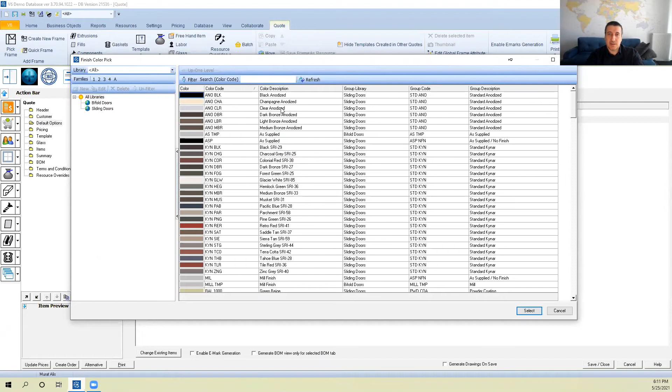If I go here, you will see V6 is supporting all types of finishes: anodized, clear, champagne, bronze, and some Kynar finishes, plus all the powder coating options with the actual colors. When you pick those finishes, it will affect your actual pricing as well, not only visually.

The same way, we can also pick a glass, and we have our own glass library with different glass thicknesses. You can build your own library in V6.

So I'm going to start with the actual sliding door here. These macros are shortcuts to add elevations quickly. So I'm going to add an elevation here. It's going to be a 4-panel elevation, overall 135.

And I want to put a screen. So this is the suggested configuration for that item. I click OK, and it's going to build that elevation dynamically.

So this is my elevation. You can see the price automatically calculated at quote time with the default options picked, and I can change those options. I can configure my door again with different track types, different head track, different sill track, different style and top rail, and so on.

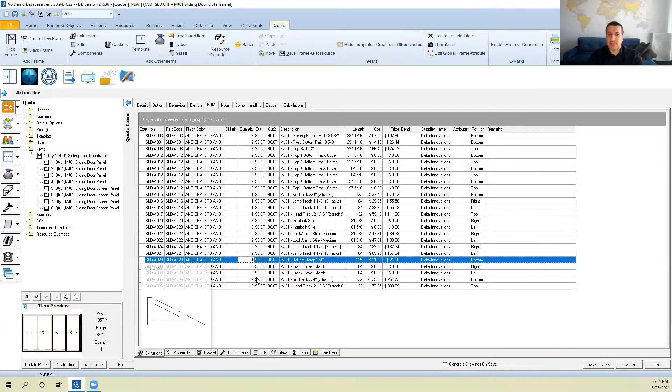Then I can show you the bill of material. This is the list of all the extrusions used in that item. We have the length, cut angles, quantities, and also finish and part numbers. This is the vendor that I need to buy the profiles from.

Then a list of components. We have just three test components here, with the actual quantities. This cost and price we can hide if you don't want to show it. And this is the glass.

You can see there's only one size of glass, and the reason is the system is set up to automatically keep equal glass sizes. So even if you change the width or height of the frame, the glass size will remain unique within all those panels.

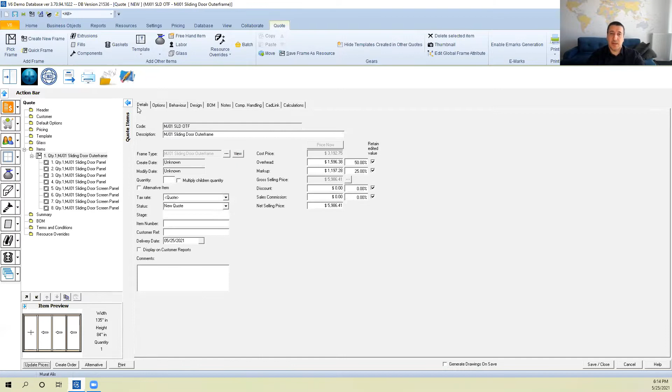Now this is my elevation, and you can see the price being 5,986. If you do a change here and make it 145, dynamically the model will update and the price will become over 6,000 now.

And if I do a 3D view, you can see that this is the presentation of that, with the actual profiles in there.

Now, if I want to make a change on this, I can click this button and say the top rail, I want to move that one to make it a bit bigger. And I want to do the same thing for the fixed top rail, the bigger ones. If I click OK, you can see right now the picture updated, and we have the bigger top rails here.

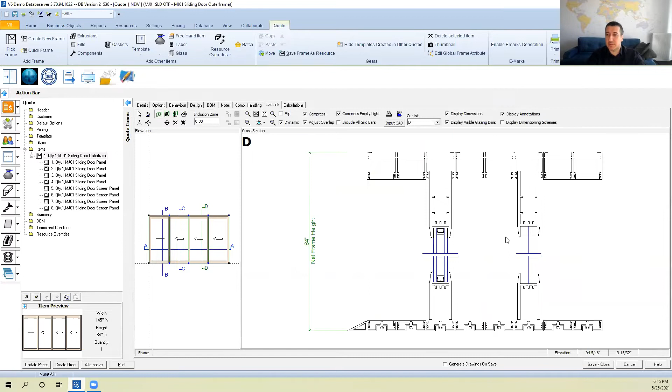And actually the price got updated slightly. The bill of material automatically updated, and also the 3D view, it will now have the bigger top rail here. You can see that in here.

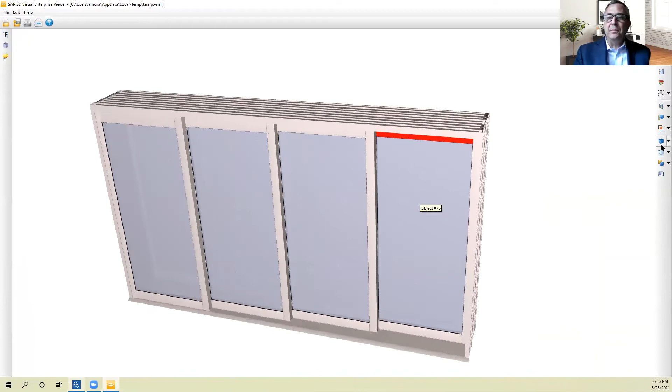So the important thing to note here, Murat, is anytime we make changes in real time, it's calculated and captured by the software engine to update in real time, correct? Exactly.

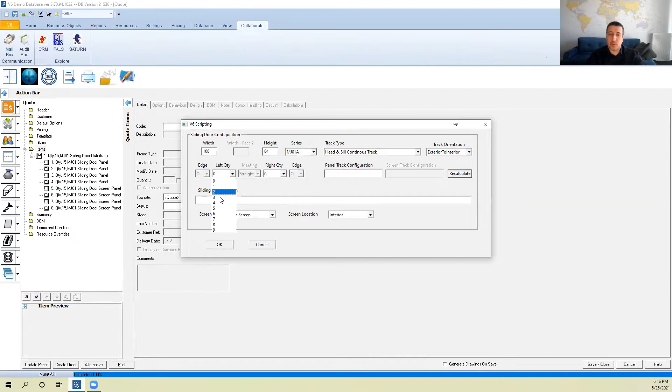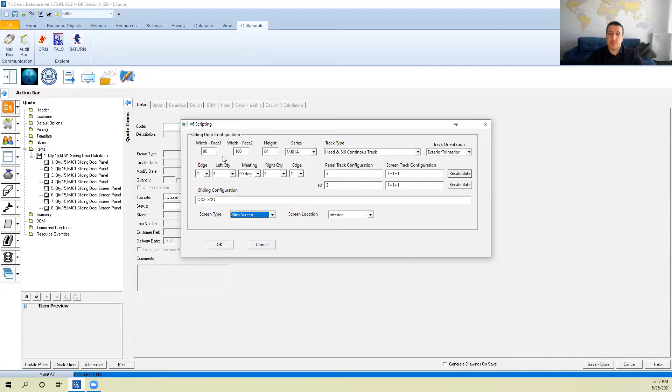Now let me add, we can put some volume to this. Let's say this quantity will be 15. I want to add another one, so I click this button. This time I will do a corner item. Let's say it's 3 by 3 with a 90-degree corner, and maybe 100, a different size here. And I can put a screen again, maybe a slim screen this time. So this is my configuration. I click OK.

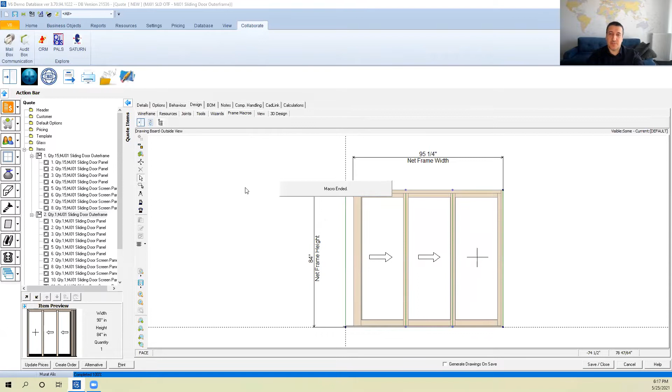And this time it will be, and we can understand better, it's 3D now because it will be the actual corner. So it will do a small model of that building, of that frame. If I show you the rotated view, this is what we have. And if I do a cut, you can see that. This is how things are coming together. And again, it's equal glass automatically in each face.

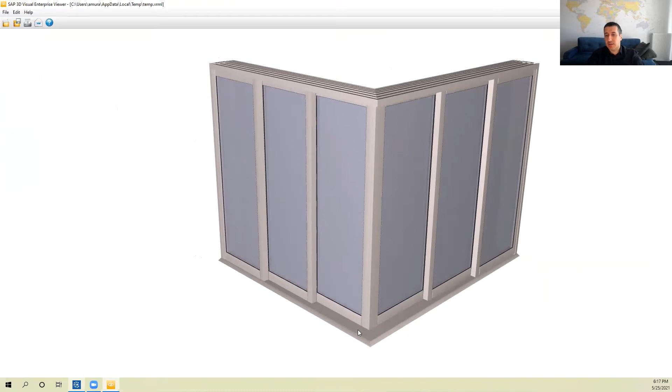And if I show you the 3D view, you will see that the V6 engine is quite smart. It has a formula and drawing engine embedded together. So what it does here is, it's saying, okay, we have a corner, and the cap here needs to be mitered. So automatically it makes that miter. And it only uses the cap on the area that we need, so the cap is stopping at that edge. So it's actually achieving a step cap.

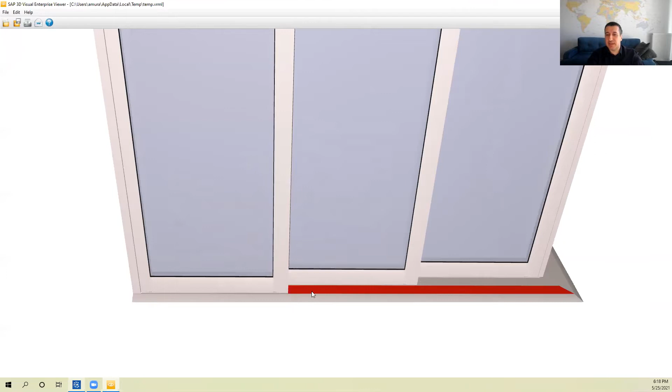Normally you would do a lot of manual work to achieve this, but everything in V6, on that database, is automatic, so you get that. And also we can see a live cross section. If I move that up, you can see how things are coming together. That's a real model of that elevation.

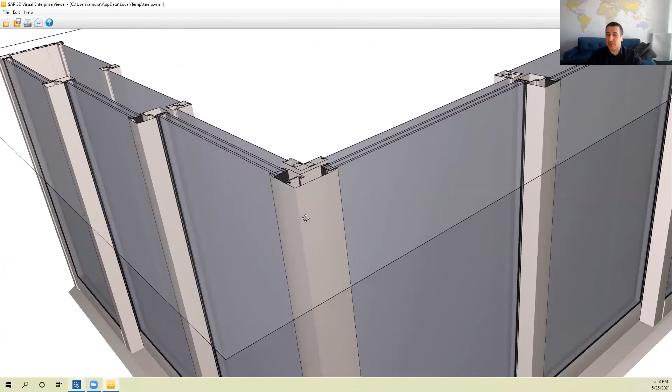So that was just the two items, and I'm going to give a quantity of 6 on this one. So this is a corner item. Now, if I add another one, this time we'll add a bifold, and you will see a different configurator for the bifold. All it asked was how many to the left and right, but that was it. And again, it's equal panel. We have the overall width.

Now, as an estimator, one important thing is that when you configure this, you need to be making sure that it's a valid one. We don't want to give our customer, a prospect, a quote which is not making sense, and which is not actually approved in engineering validation.

So I'm going to change this size to 165. So far it didn't fail. Let's make it 175. Now you can see there's an exclamation mark here. And if I bring my mouse over it, it says the maximum allowed width is 40 inches, and actually my panel width is 42 inches. So it's warning me that there is something wrong here.

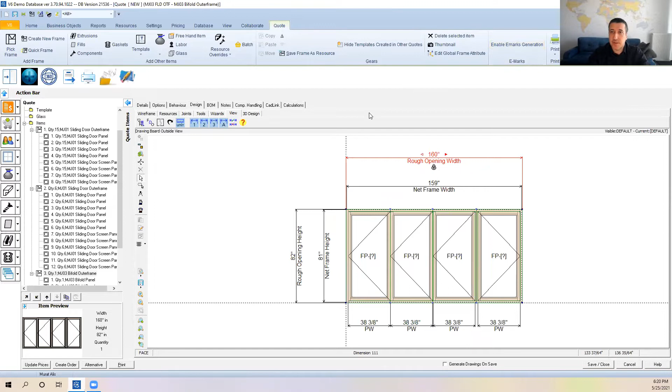So it's important to know we provide engineering validations on a number of areas, right? Weight, wind load, could be a number of different things - size, width, height - and all those rules are given to us by the customer to input into V6. So again, the goal is to not let you build something that can't be completed in your factory.

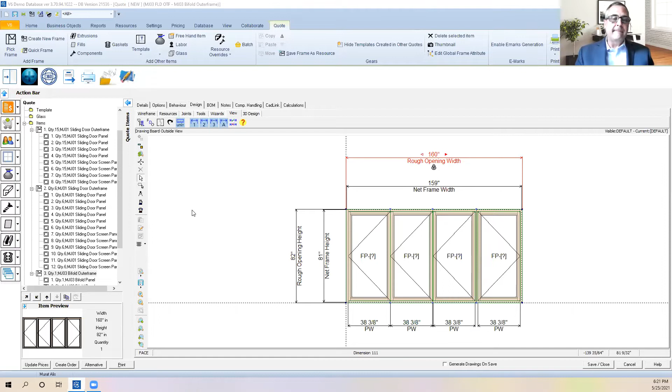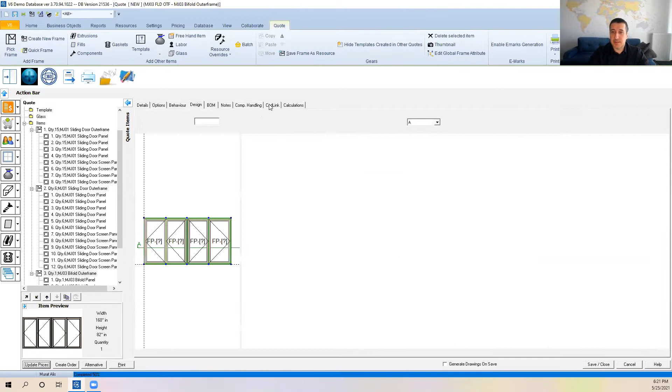Exactly. And this is a 3x1 configuration, and you can easily go... and if I show you the cross section again, you can see this is how it looks like with the hardware. And if I go and change that back to 2+2, you will see the elevation view updated, as well as the cross section here at the middle. So this is all dynamically done by the system.

Hey Murat, we got our first question that's really pertinent. It says: if you have multiple product series that use the same configuration, how easy is it to change the complete product series, either per line item or per complete order?

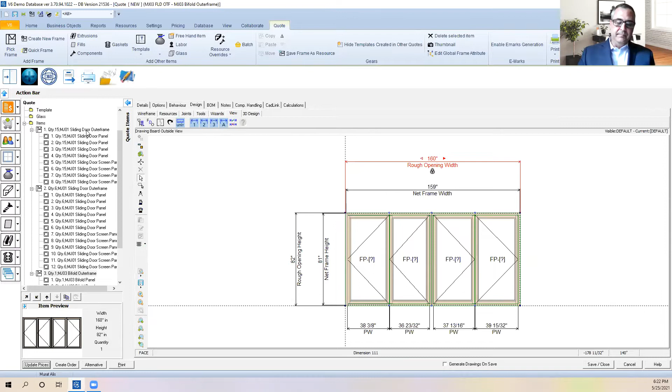So can you go back and... Yeah, the way it will be done probably is you will have a system type. So here we have a series, MJ01A. And if you check that, it has some cut like this. So if I go back here and change this option type, I'm gonna change that to B. So it automatically changed my head and sill track to B.

And actually the detail here is changed, and it becomes a different profile there. So that can be achieved by just adding an attribute and making it compatible, or you can use the native feature to completely keep the frame types separate, and then you just change the full product type from one to the other, and the design will remain as it is, and only the bill of material will update. So there are multiple ways of achieving that within the system.

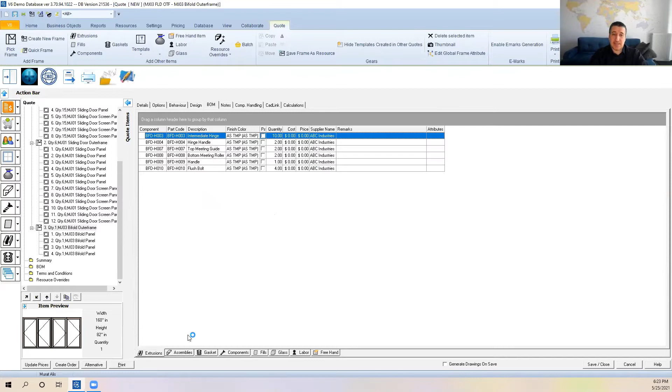Awesome, thank you. Sure. And if I go back to the bill of material, one thing we also support is if you have pictures for the hardware, you can add them and they will show up here. So in the bill of material output, we can see those pictures printed. As I shown, that is also possible to do with the extrusions.

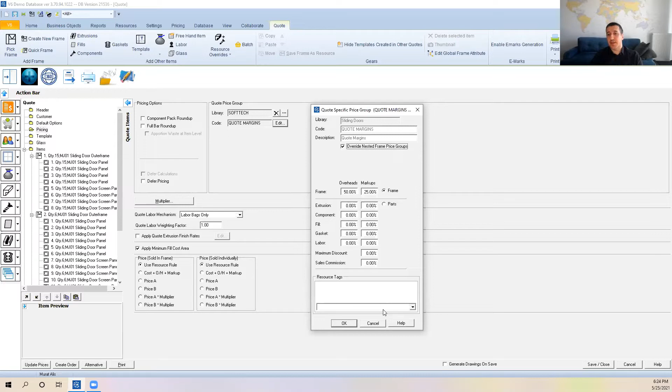So that's the summary of how we create a job in V6. We can see here the total cost, so that is 135,000 is the final price. We can set up our margins here. That model is cost plus markup. You can see 50%, 25% here. And accordingly, it is calculating based on this cost and overhead markup, the final price, okay?

So now when you're happy with this job, you will just save this. And right now I didn't attach any status to this, so you can see in here, there's no status. Actually, I could say that this was just a new quote and save it. And V6 supports that status. And when you integrate with another software, actually, you could use those statuses to do some actions.

So if I go here, you can see I have folders for all the new jobs - anything's in revision, lost, order material, pre-production, in production. So you can see a couple of different folders are there, and you can actually see what's going on within the factory, where is a particular job is part of. And this, ideally, you need to integrate with an ERP system, and automatically those status are updated by the right people.

So if I just open one of the jobs here, this is an existing job, so it becomes an order. You can come here and change that from new quote to production, and just release the paperwork for production. In this job, you can see I have one item here with 4 panels and 14 panels, and another one with 3 panels.

Now I will show the optimization feature, and that's an important one. Right now, in all those profiles, we have a stock length edit, and typically it's 1, but to just show you the power of V6, I added a bit more than 1. So if I open one of the extrusion resources, you can see in this one, we have 120, 160, 198, 240, and 256 inches. So between 3 to 6 meter, basically, different stock lengths are there.

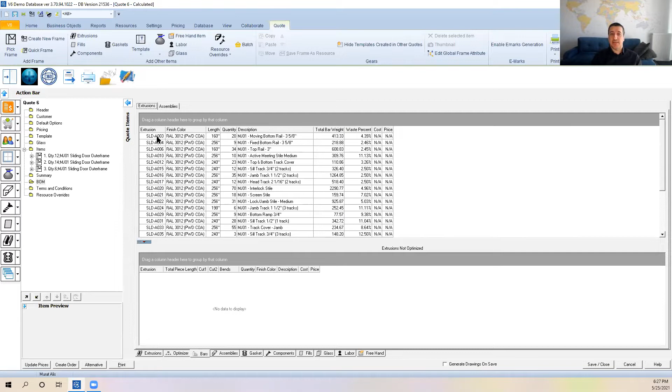And what it will do is when I say optimize per standard length, it will pick the best length out of those to optimize. So it's just doing the optimization. And if I go to the bars, you can see for SLD-A003, it's suggested to use 20 pieces of 160 inches. For this one, 9 bars with 256, and so on.

This will be helping you to reduce the wastage. But actually our system supports custom length as well. So what it will do between 160 and 256 inches, between 3 to 6 meter - I'm just saying each and every 100 millimeter, 4 inch approximately - check all the lengths and find the best length for each. So I click that optimize button. Now it's actually doing optimization with all the different lengths from 160 to 256.

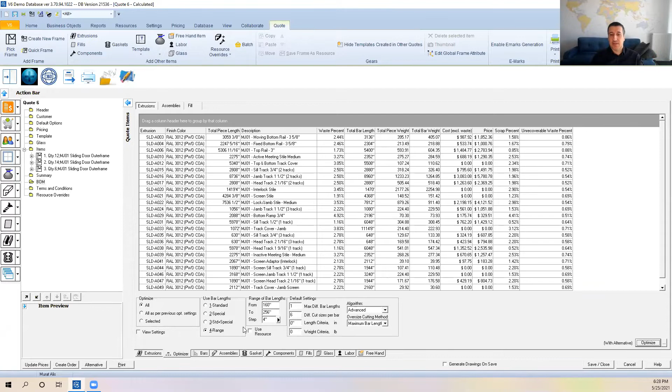And for each profile, it will suggest the optimum length. You can see the wastage now are within the 1 to 3% range, including the unrecoverable waste as well from the saw thickness and the end trim at the end. So if I go to the list of bars, you can see I need to order 14 pieces of 224, 9 pieces of 256 from this profile. All of them have different bar lengths. So that's how we do the optimization.

Now I save this job, and then I will print a quote report out of this one. So here again, we have shortcuts to print reports. I click this button.

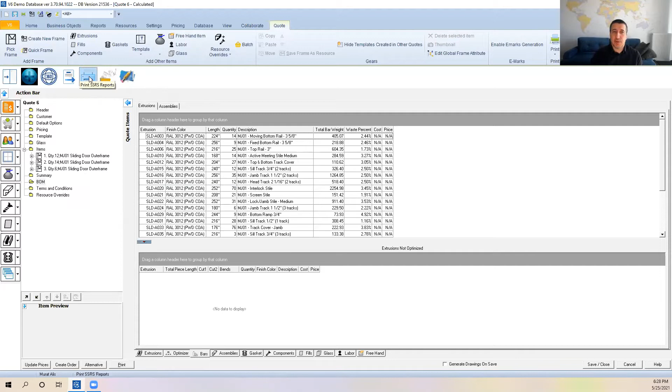So it is bringing this screen to print reports. What I want to print is the quote report. You can print multiple reports as well, and this is customizable. You can have as many categories and as many reports as you like. So this is going to be a quote report. I'll say print selected, and then it will print that report.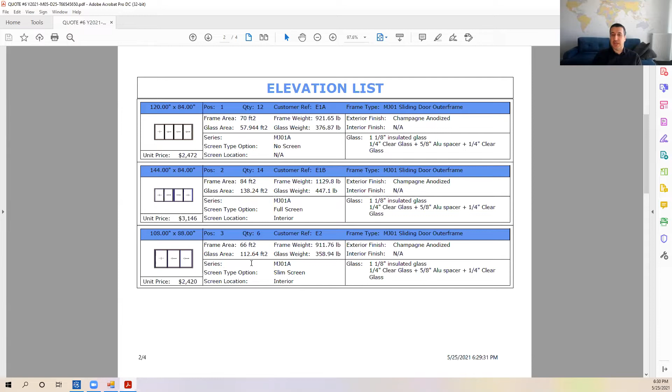Also, you can put as many options as you want to show your customer. Here I limited it to 3 options to show, just whether there's a screen or not, and which system type I used as a sub-series.

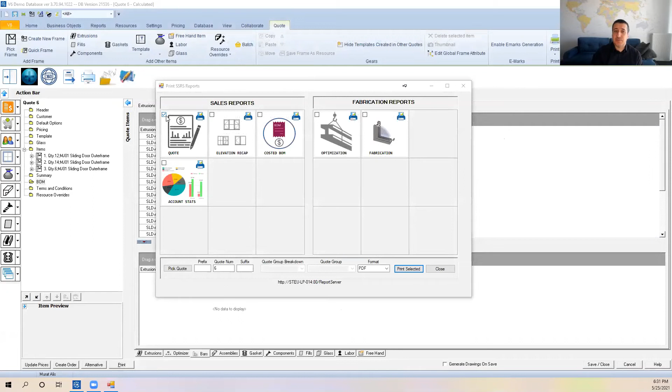Now another thing I will show, before going to the fabrication part, is the sales statistics. This is just one example again, and we can have as many as we want. Actually, what I do here isn't particular to this job—I just say, within all the jobs, give me the account stats.

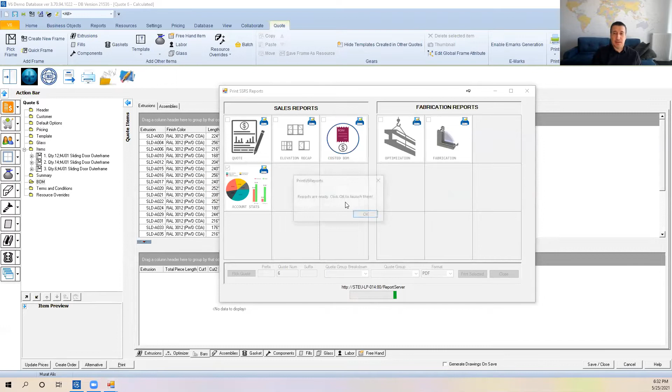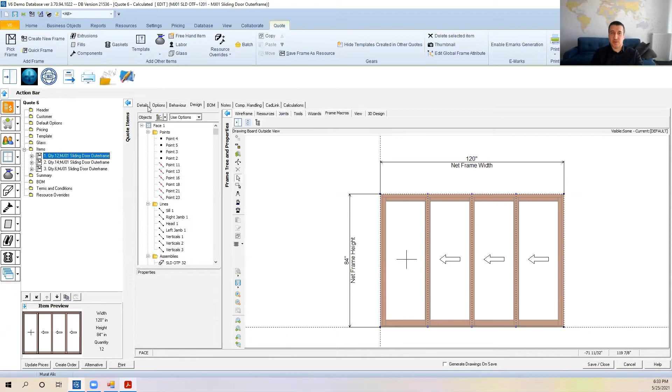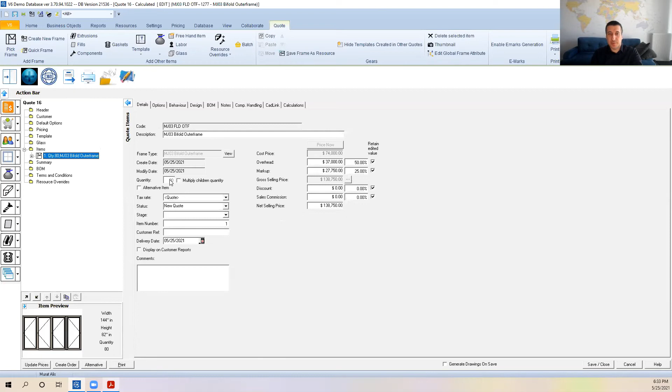So what I will do is increase the quantities a lot here to make quite a large job. I'm going to close this. Yeah, this is in production, so it's not allowing me to change it. So what I'll do is open one of these, and I will make—sorry, let me create a new one.

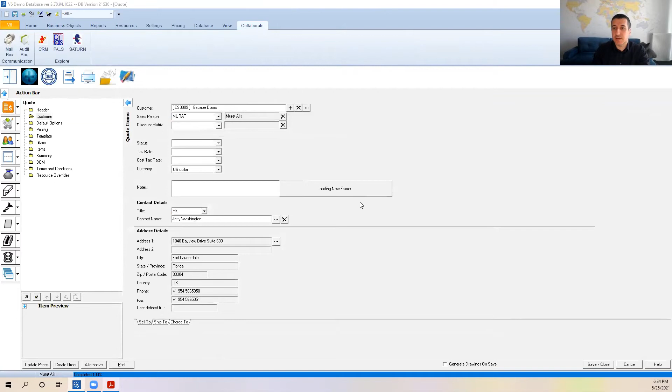So calling it test job, I will just add one item on this. This is escape doors, and the contact name and salesperson is me. Adding 5 panels, and I'm going to make the quantity 200 on this one—we wish that we had those type of jobs, of course, but...

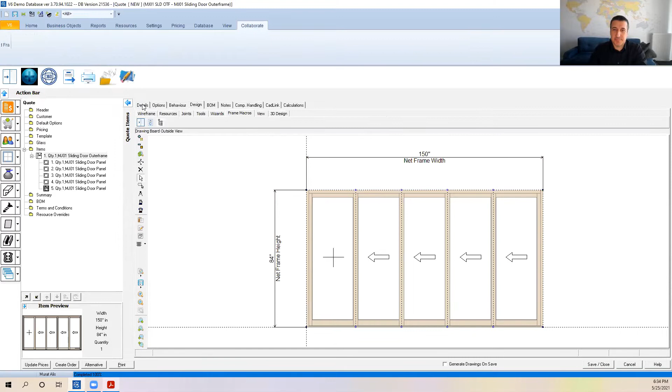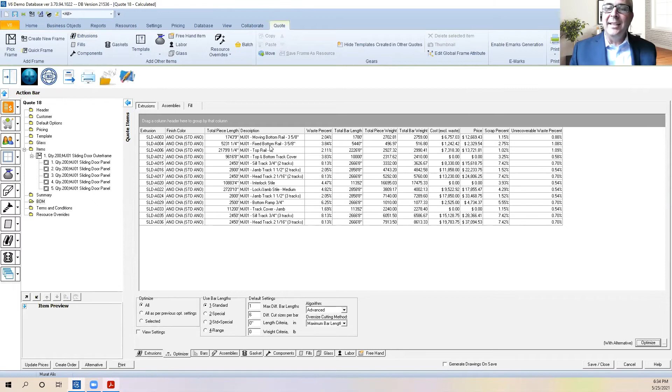One small note, probably something you take for granted, is this system floats back and forth seamlessly between imperial and metric. So you can enter something in metric and it will display in imperial and vice versa, for anybody outside the United States that deals with metric.

Now if I go back to the report outputs, what I showed you was a print macro to print the reports. This is what we call a custom macro screen, so we could have your company logo here, a different design, and a completely different interface. If I print another one using this button, you can see there's a different design—this is a bit simpler, no graphic. You can pick what report you want to print and then get the list out of it. Just wanted to show you the difference between them.

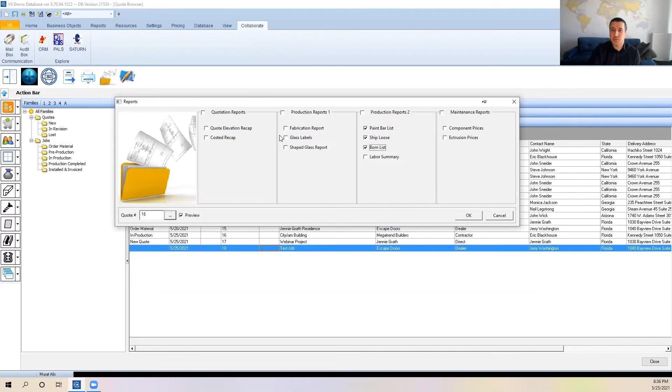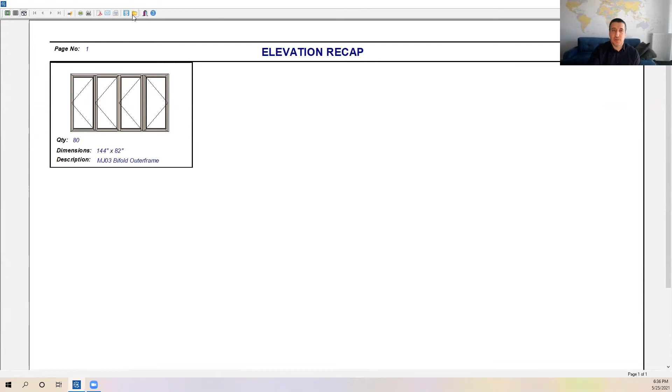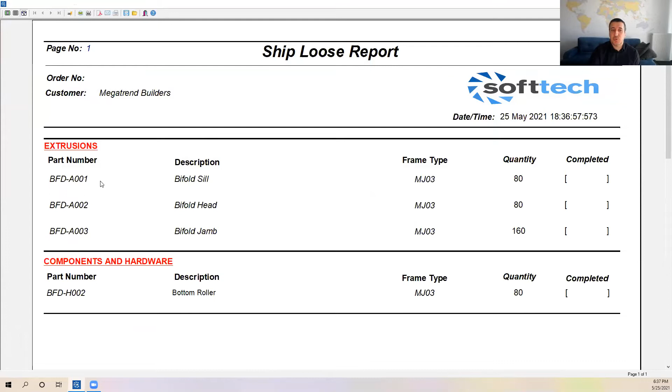So if I pick a job here, number 16, and say I want to print these reports, you will see a different type of reports getting printed. This is the recap with all the elevations showing together. This is the cost analysis. This is the paint bar list with all the bar quantities. This is the ship loose report with the items that need to be shipped together with the frames. And this is the complete bill of material with the cost, if it is there. I can show that in another system with the cost, and you can see the glass cost is added here. So that's what I can print from this different print button.

I can also show you the shop drawing output. So here I click that. What it's doing is actually creating a PDF output and DWG output in a folder. When it's over, it will give us a message that it's done—you can see the file name. As a user, you can either send that PDF to your customer, or use it on the shop floor. But you also have the DWG output that you can use and add more details to your shop drawing.

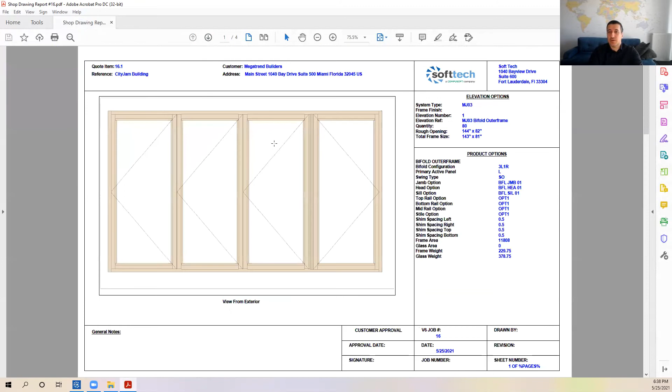So this is the elevation view with the options about this elevation. Then we have the list of extrusions, hardware, and glass. You can see this is the list of extrusion, hardware—if I zoom—and the glass. In the next page, we will see a horizontal cut, and in the next page, a vertical cut. Again, dynamically, however many cuts you have, it will show them all there. So that's an example of that.

And then finally, I will show you the optimization output. This will take about a minute. So Jim, if you have any questions that you want to cover, you can cover now.

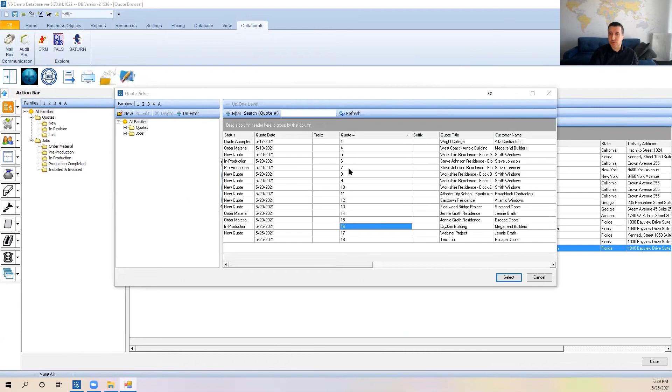No, I mean, we've had some really good interactions. There's been a lot of questions I've tried to answer mostly on my own. One of them, I'm not sure—I don't know how we're running on time, I don't know if you could get to it today. I suggested something more intimate, but the question was, Murat, can V6 automatically configure performance requirements, thus substituting out BOMs to meet the performance requirements?

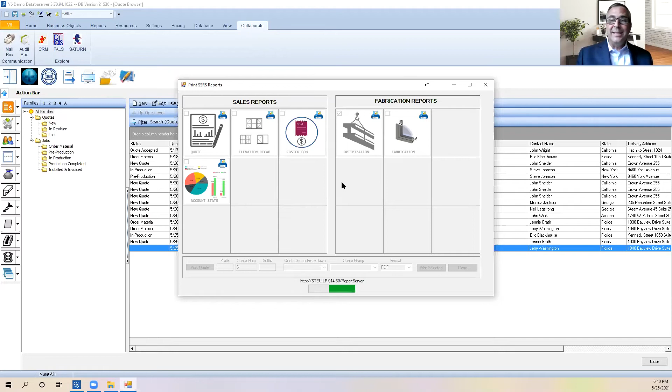So in essence, let's say you build something to meet a certain thermal property, but then you change the size and then you need to still meet that same thermal property. Will V6 change out the pieces and parts knowing that that thermal property is the most critical part, or a structural part—maybe it needs to be a commercial rating, whatever it is. And my answer was yes. I don't know if we have time to demonstrate that today, that's all. Yeah, sure, the answer would be yes.

And that will require some formula substitutions. As per the parameters, we can do it—we can do it based on any criteria. We can actually dynamically change the parts. So we have the report ready.

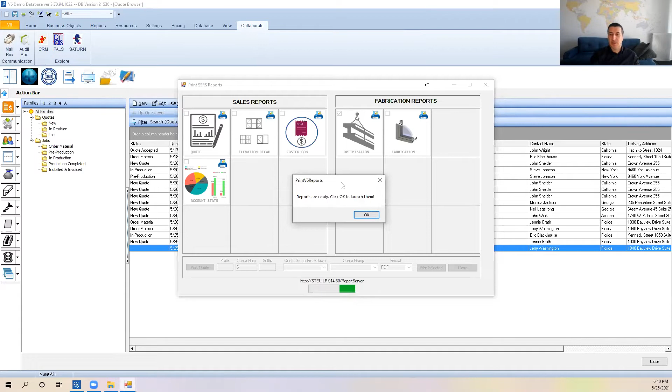So that's an optimization report actually showing the job name. We need 12 bars from this profile. The bar length is 224 inches. The waste is 2.32%, and that's the length of the waste. How I need to cut that 224: 6 pieces of 25.94 and 2 pieces of 31.59 inches, cut with 90-degree angles. It also tells in which position those are going, so we can see their positions and know which piece goes where. We can also print labels with barcodes, and attach another report so you know exactly which piece goes to which frame, which elevation, and how you're going to manufacture it. So all that is available within the system.

So I think that is including the initial part of this database. Also, we recently released another build, which is a 3.8 version. That's a newer version. It has a slight difference in the interface, and I would like to show you that. We are continuously making changes to our features to make it more user-friendly, so I think it will be good to show you that database. So let me.

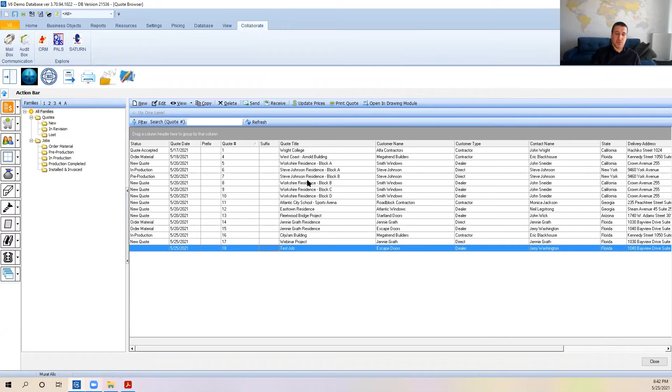Labor report? Yeah, so I don't have a labor report on this database, so I'm going to open another one and show you. This is our demo database, we didn't build labor on it, but I will show you that right after.

Basically, I had two questions in a row. It's like, hey, does it take into account labor? And the answer is absolutely yes. It gets very detailed into labor - you provide us exactly how much time it takes to do every little function in producing a unit, whether that's screwing in four screws in a door hinge, or how much time it takes to make a cut on your aluminum. Anything you can think of, we can apply a labor rate to.

So I'm opening another database on my other screen just to show you that.

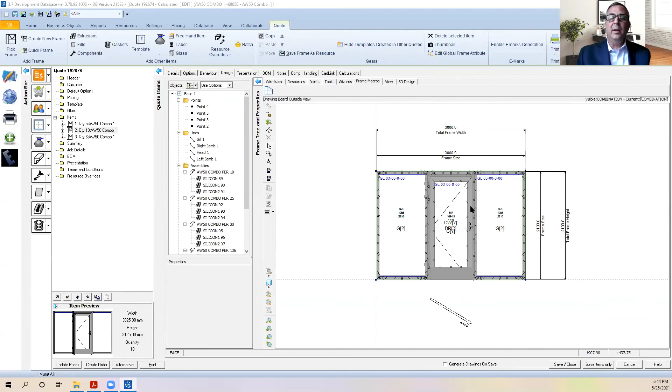Now, what's interesting to note while Murat's doing this is where SoftTech is different - when he says he's opening up another database, that's where we differ from a lot of software manufacturers. The database is your database. You own it, meaning you have the ability to make changes in real time - modifications, deletions, additions, subtractions - as you see fit on your database. We are there to help support you and make changes, but it is your database. It does not belong to us.

Exactly. So here you can see a door with a curtain wall - a door nested in a curtain wall. It's a different system. So in that, if I go to the bill of material...

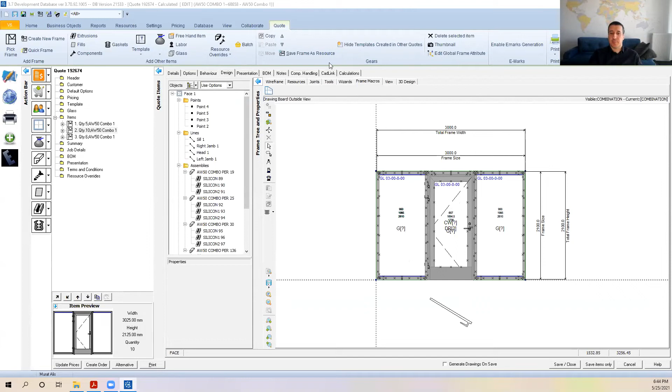and go to labor, you can see actually it's calculating the labor for each item. So we have machining, assembling, glazing clips, installation of the gaskets, hinges, mortise lock, cutting of the profiles - all the hours, minutes you can see here, with their actual areas.

We also have our scheduling module that we can export that data to and link with it to actually optimize and schedule the fabrication. In the factory, you can have all your people added in that scheduling module, and they can check in and check out when they do the work. Each of these labor items can be associated with one worker in the factory to do capacity planning on the scheduling part. But most importantly, this labor will be reflecting your cost, so that your final selling price for that job for your customer will be as accurate as possible.

So now I will go back to that new version that I was talking about.

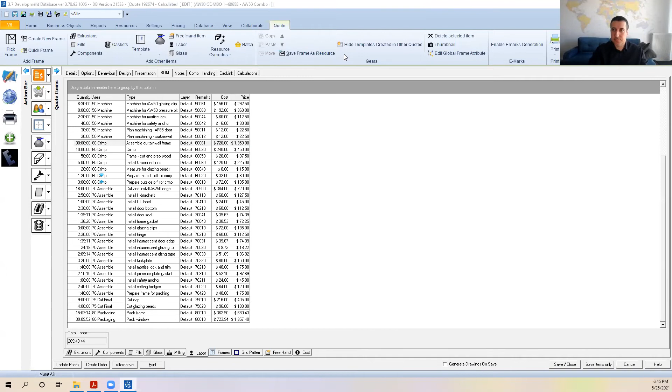So you can see the interface is quite different - it's a different look. What I will do, again, is create a new quote here.

And I will pick a frame from the database. So this frame, for example - in this case it's a casement window database - I can actually pick from a pre-configured item. So I'm just selecting that, and it is added in the list.

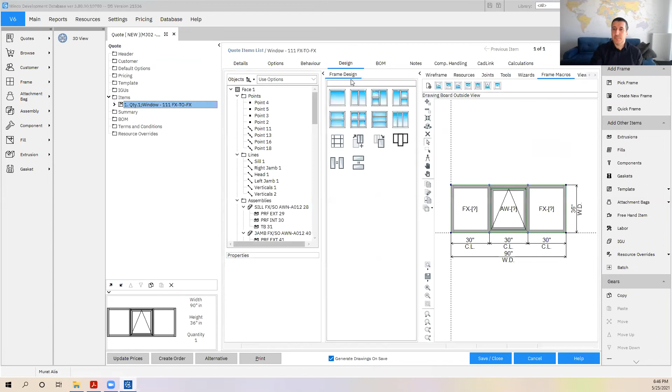So this is my awning fix. It's a casement system. If I do a 3D, you can see how it looks, and it's quite a different design. So you can see all the elevations with their thumbnail view here.

We have different views, like list view. And if I go back and actually select this, copy and paste, so I just created another elevation.

And in this one, maybe you don't want an awning. So it's very easy, you just click this one and select a hopper. And when I do the 3D, this will dynamically update from open out to open in.

And if you are happy with this elevation, what you can do is come back here and save that frame as a resource to the database with a particular configuration, give it a name, and save that to the database.

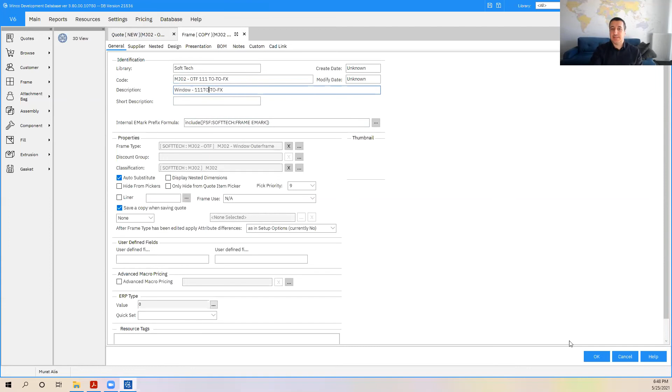So next time, in a new job, if you or one of your colleagues pick a frame, that new item will also be on the list. So easily, you can build your own library with a lot of pre-configured frames as well.

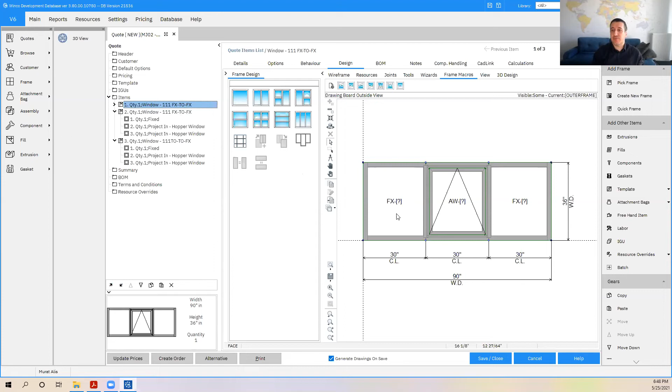Now, another key feature that I left here specifically is our EMark feature, and this is quite important for fabrication. So you have two elevations here, and you can see this fixed part is the same, but we have two different sashes here.

And then we have another one, almost identical. What I will do is change this to a different name. You can see it automatically made these equal, but I don't want that, I want to keep this one as 30.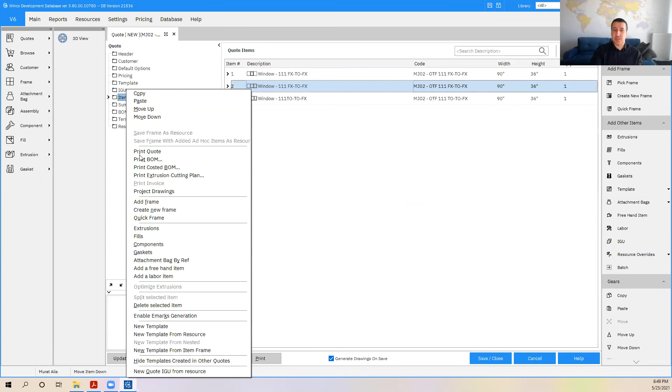So now I will activate what I call Emark generation. And if I go back to our elevations, you can see V6 automatically assigns numbers to each frame. So we have FX1, these fixed windows are identical ones. Then we have the awning one.

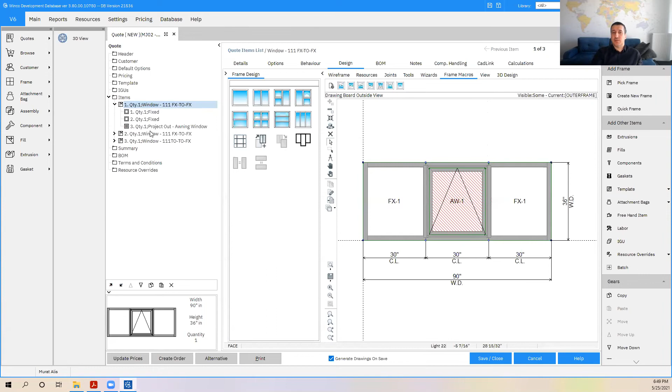Go to the second one. I have another FX1 because it's the exact same size and bill of material. I have two different hoppers because they are not identical as per the size, and then I have another two.

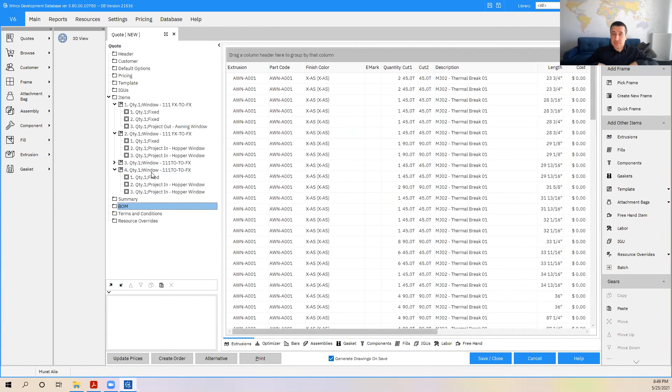So if I copy this and create another one and make that fixed window a different size, 33 inches, now if I calculate the bill of material, it will check all the items in that job and reassign the number FX2, because this is the second fixed window to be fabricated. So that is all dynamic.

So that concludes my presentation. Jim, am I on time? Yeah, you've got about 5 minutes.

I'd like to ask you to do one more thing. I'd love to show, can you show how that extends into the reports? Because I always felt like the E-marks were great when doing fabrication and having those FX1, HP5, even the glass sometimes. So can you show a report that shows those, how it's even broken down on the report? Sure, let me check that, one second.

So the questions have been lively. We've got about 4 more minutes and then we'll pull up a screen and I'll have an email for contact, and we'll ask if anybody wants to ask any live questions. But I do want Murat to show that one last piece, if you wouldn't mind.

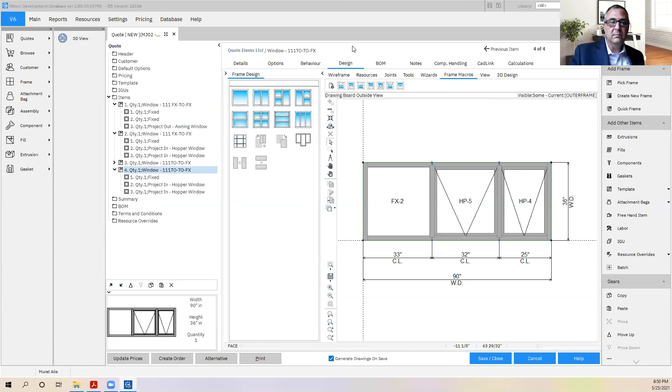Sure, just one second. Again, I'm on my other screen. Anything you ask, actually, we like those questions, and we want to do it live rather than just say yes, it's possible, we can do it, but it's better to always show it like how we will do it. So that's what I'm doing right now.

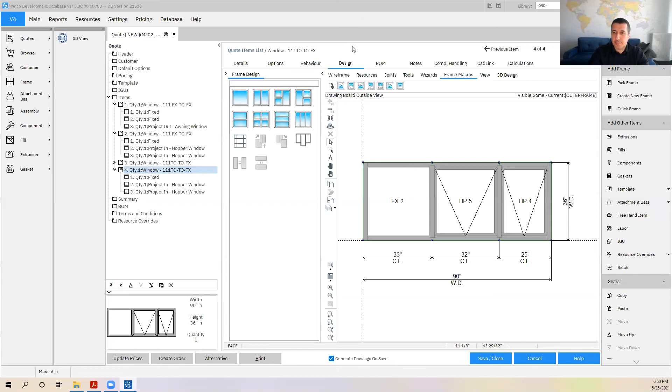Okay, so what I did here, I picked an optimization report out of the system. And you can see this is metric now, so people who join from a metric region will be liking that, I guess.

So I have one piece of 2057.5. That one has an E-mark for the actual piece of profile. As per the machining, the unique length, every profile which has the same length, same part number, cut angle, and machining, they will have a unique E-mark. So this is what you see here.

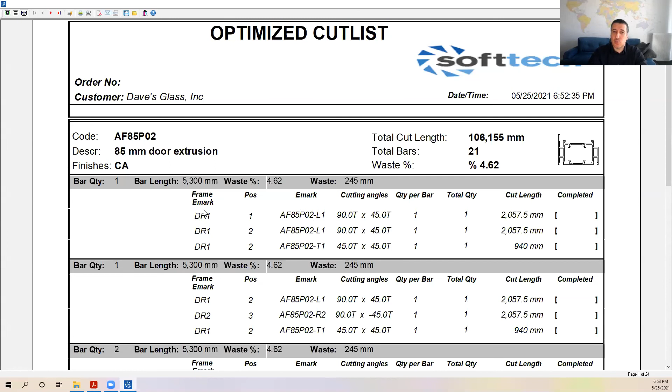This one is going to position 1 on that elevation, and it's going to DR1, door 1. So this is a bit more complex. You can see I have 2 of the same profile size, but one of them is going to DR2 and the other is going to DR1. That way you can actually put pieces together and know which extrusion needs to go in which assembly area to do the panels, doors, windows, all those items.

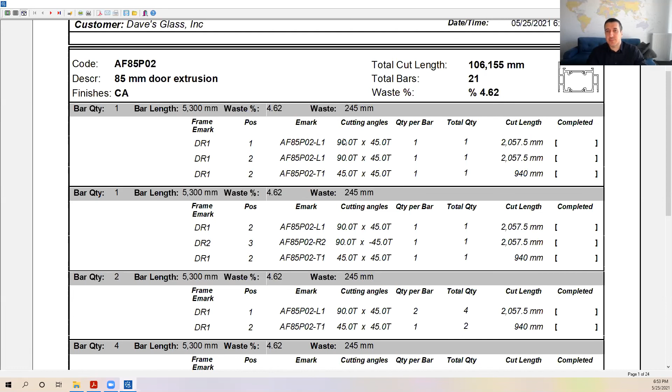So that's a report output for the optimization, which is quite different than the first one I showed, because all those reports are, again, customizable with your wishes.

No, this is helpful, this is what I wanted to see. It really demonstrates the waste and shows the E-marks on what was made per order, where it needs to go, and why you cut what you did.

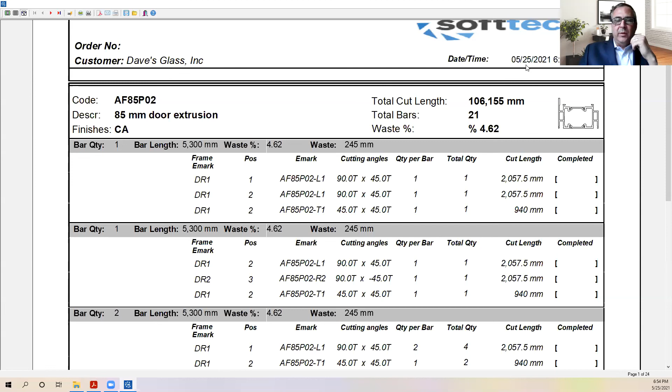So on that, I think we're going to end the demo, Murat. If you'll relinquish control, I'm going to pull up a different screen, the last page of the PowerPoint.

Sure, so just verbally I'll talk about a few things we didn't cover. Normally I can do a live demo, a more private demo. Even V6 is such a huge software that we could do a 4 or 5 hour demo and there would still be things to show you. So in that little allocated time, we wanted to show as much as possible without giving you too much information. We can do curtain walls, unitized, stick. We can input wireframe shapes, and also export data as 3D. Those are some of the features we have, and we can tackle them in another presentation if you want.